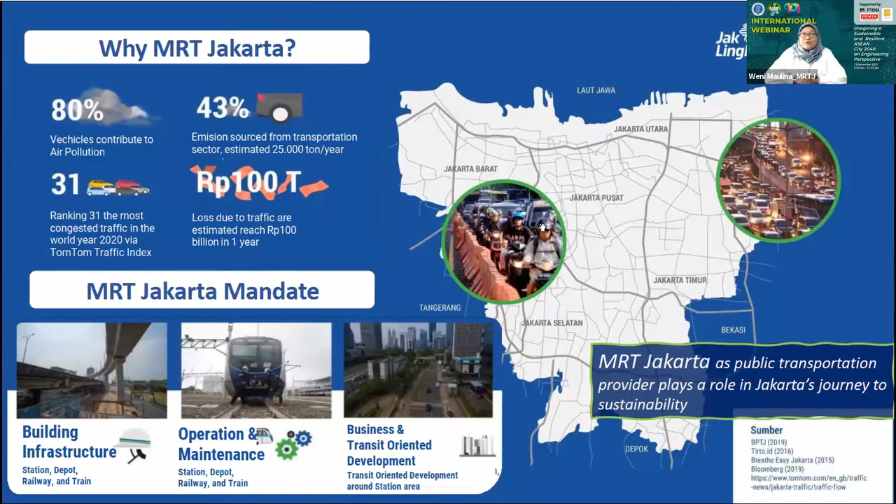Currently we are building MRT Jakarta phase 1 and phase 2 lines. For phase 1, from Lebak Bulus to Bundaran HI, from the southern part of Jakarta to the central part, we have built and now operate this, including 13 stations, of which 7 are elevated and 6 are underground. Currently we are also constructing the MRT line for phase 2A, which consists of 7 underground stations, about 5.8 to 6 kilometers of line.

In the future, we will also construct the phase 2B area, which goes along to the north, to the depot area in Ancol Barat, consisting of another 6 kilometers. Currently it's under feasibility study, and we are going to start the basic engineering design soon. All of these constructions are funded by a JICA ODA loan.

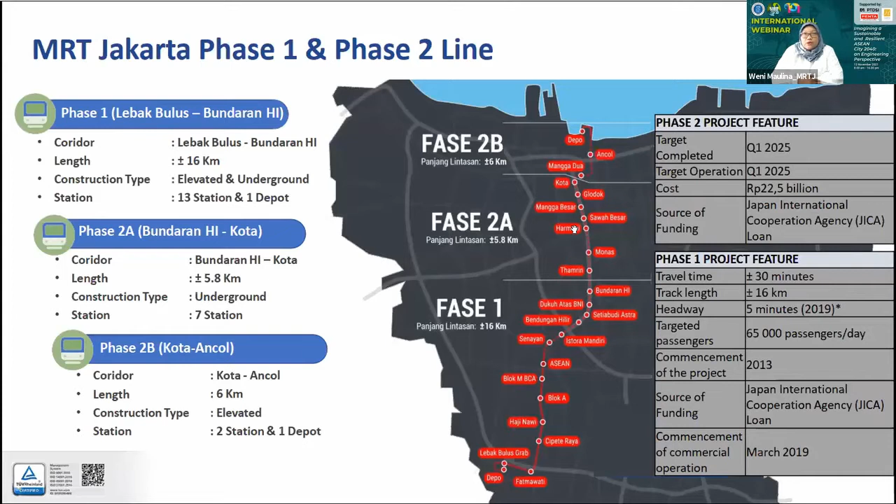As I introduced before, the MRT Jakarta journey actually started a long time ago, since 1989, with the first study of the Jakarta mass transit system. In the year 2000, we conducted the feasibility study of MRT Jakarta, funded by JICA and conducted together with the Ministry of Transport and the provincial government of DKI Jakarta.

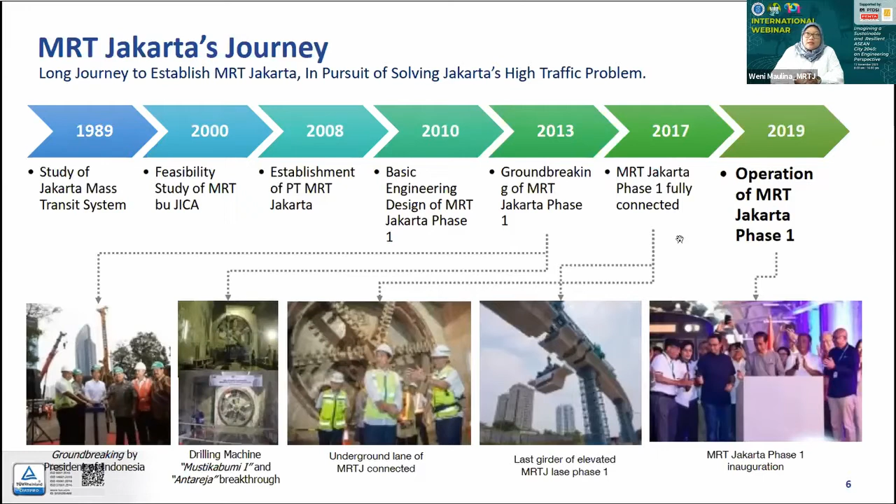In 2008, PT MRT Jakarta was established. Since 2010, we started and finalized the basic engineering design together with the Ministry of Transport, Directorate General of Railways. In 2013, we started the first groundbreaking of MRT Jakarta. By 2017, all of the infrastructure had been connected from south to the central of Jakarta, to Bundaran HI. Lastly, in 2019, we started the operation of MRT Jakarta, and at the same time we also started the phase 2 construction.

We have a traveling time punctuality of 99.8%, dwelling time of 99.8% also, and arriving time of 99.7%. So as you can see, we have almost 100% punctuality in terms of time.

So how can MRT Jakarta support and create a sustainable city? I would like to explain first from the economic point of view. Not only the operation of MRT transportation, but also since the construction of MRT Jakarta, we have played the role as a stimulus to the economy by having about 1 million US dollars for capital investment and also revenues.

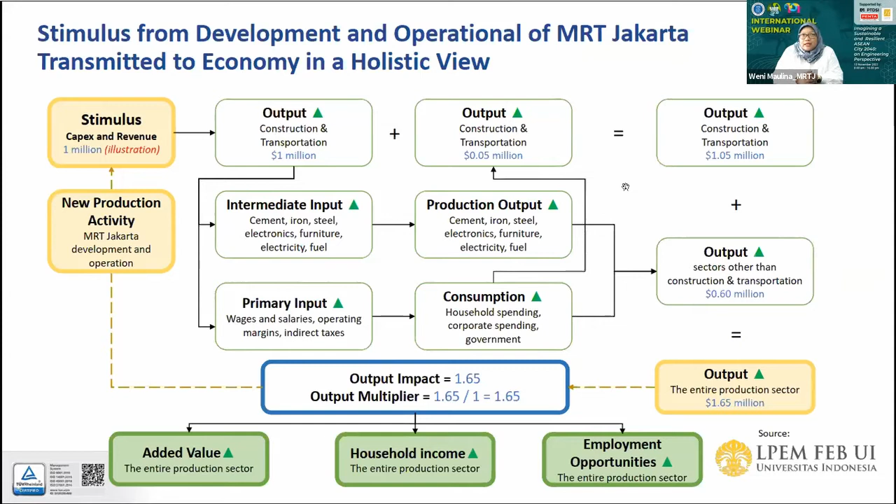So basically, by having the construction and operating the MRT as a public transportation mass rapid mode, we generate added value and also generate household income and employment opportunities.

So by having the MRT Jakarta during the construction and the operation time, we are giving a stimulus to the economy, not only of Jakarta but also in the national region.

We also have economic impact by building the transit-oriented development. In the MRT Jakarta TOD scheme, we have coordination between the government, MRT, and the developer. The government will collaborate with the developers and also MRT Jakarta.

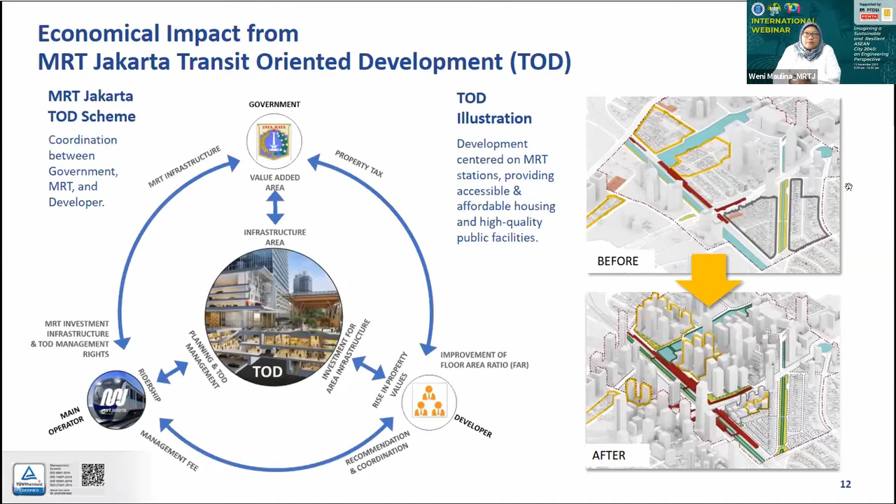Maybe next slide we can explain what is the potential of MRT Jakarta based on the TOD itself. We have the potential multiplier effect, about 242.2 trillion rupiah, the growth of property values in the MRT Jakarta area along the line.

And then we have the potential of 639,000 employment, about 34,000 units of potential development on affordable housing in the TOD area, and also 149.1 kilometers of pedestrian path that's going to be built, about 73.9 hectares of public open space that we have identified, and about 56,800 square meters of active riverside.

So when we construct and operate the MRT Jakarta, it is not only solely on the transit or transport mode itself, but also on the areas nearby that we're going to develop.

So the potential contribution to MRT development: first of all, it is the biggest contributor for the MRT non-fare box revenue, and also the source of funding for future MRT development, and then improve the pedestrian access and comfort around stations, and provide adequate integration with other public transport modes.

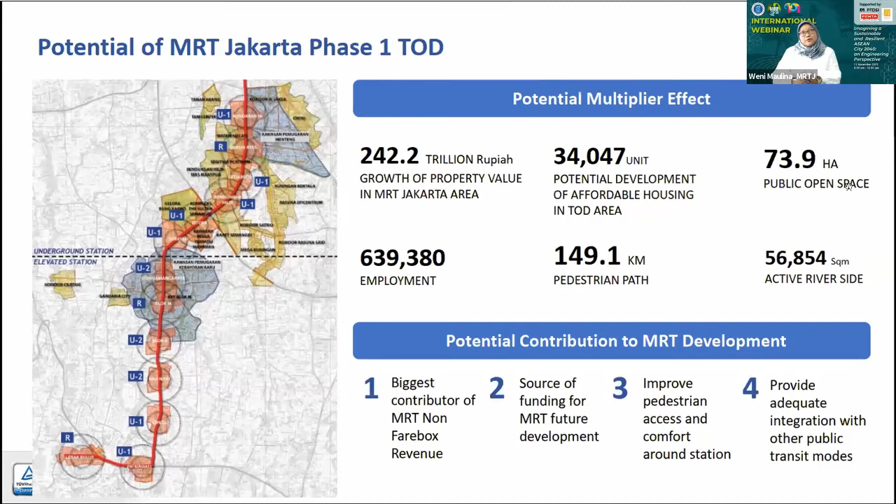One of the highlights we are making by having the underground MRT stations is that by providing connections to the surrounding areas, investment and development of the interconnection around stations will become an advantage for the surrounding areas and trigger regional revitalization as well as economic growth.

I think this is the main issue that we are going to discuss today: how MRT Jakarta can give better accessibility to the surrounding areas.

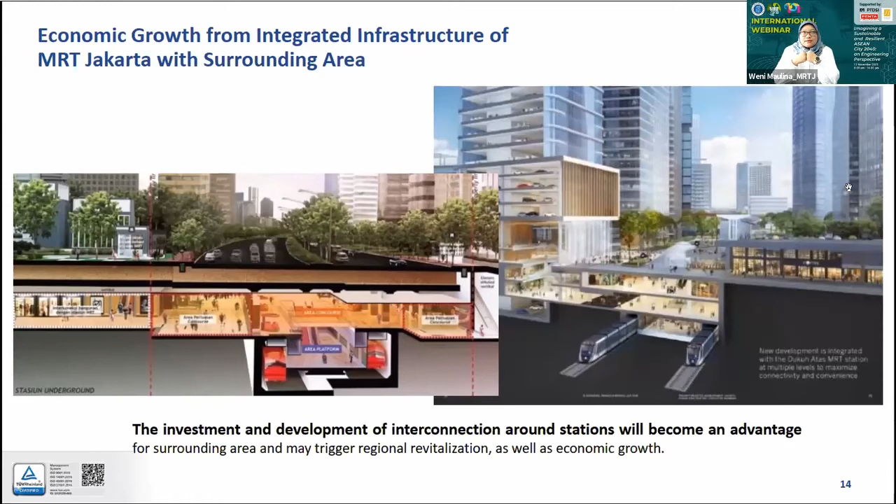As part of sustainable public transport, other than providing the transport mode itself, we are also building a new culture. This has been done since 2019. We have always made public socializations of how to use the trains, how to get down from the trains, and so on, and it kind of changed the habits and culture of the people of Jakarta.

We provide also better opportunities like having public space, building public spaces, green spaces, pedestrians, and also bicycle infrastructure.

So some habits that are changed is that... sorry, bisa di zoom?

The first is that trying to shift people to use the public transport modes, and they are using not only MRT, but they can also use their own bicycles to go to work, or from their homes to their destinations. MRT Jakarta facilities can provide bicycle racks, and we also provide bike areas in the trains, or they can use folding bicycles very easily and still use the trains.

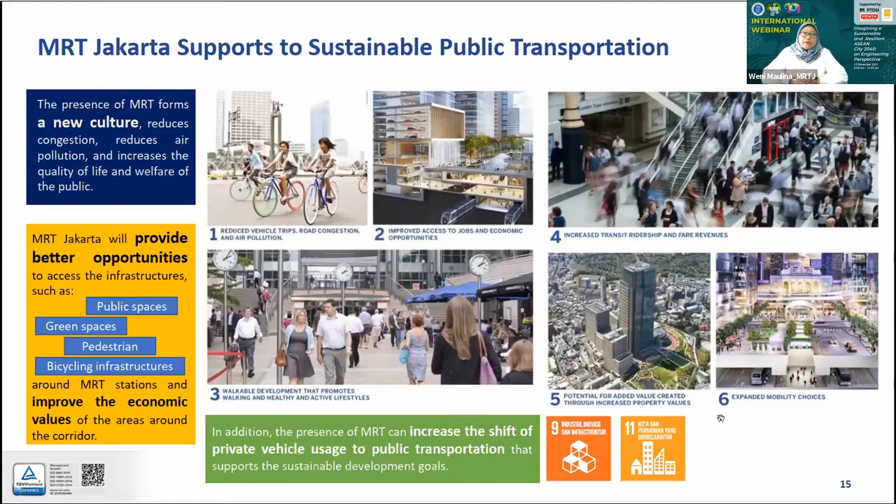Currently, MRT Jakarta has a policy of sustainability management by applying ISO 26000. We have prepared this as one of our sustainability strategies based on the social responsibility and sustainability roadmap. We also have applied ISO 14001:2015 on the environmental management system, and we have applied integrated management systems, not only for quality or occupational safety and health, but also considering railway safety, environment, and security.

One of the sustainability goals we are now applying is energy efficiency in our trains. First of all, we are using electricity as the main energy source, utilization of LEDs, and non-CFC air conditioning, and we provide platform screen doors for energy saving. The benefit is a reduction of carbon footprint generated by motor vehicles currently using fuel, reduction of greenhouse gas emissions that trigger global warming, and improved urban air quality to support the sustainability of the city in the future.

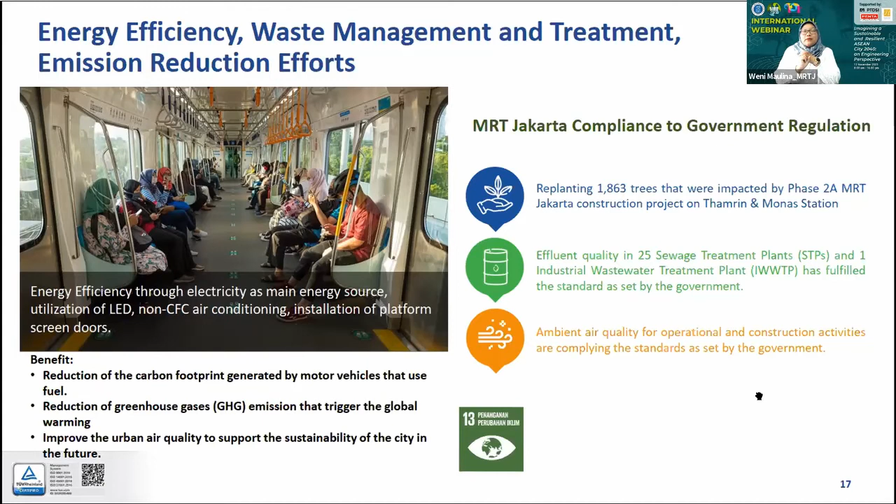Here is also our initiative to create a better environment. We have conducted collaborations with some startup companies, which motivate and encourage the environmental sector. We have collaborated with Jejakin and Rekosistem for the digital recycling system, and we have also collaborated with a bike sharing company.

For sustainability development, we also engage in social management. We have collaborated with Pos Sahabat Perempuan dan Anak (PSPA), and with UMKM empowerment programs, so most of the retail in our stations is also collaborated with UMKM. Internally, we also encourage gender equity through Equi Talk, and in terms of facilities, we have provided accessibility improvements in the stations and surrounding areas. Lastly, we have collaborated with and supported the mitigation of COVID-19 impacts with the provincial government of DKI Jakarta, including initiatives for mass COVID-19 vaccines and so on.

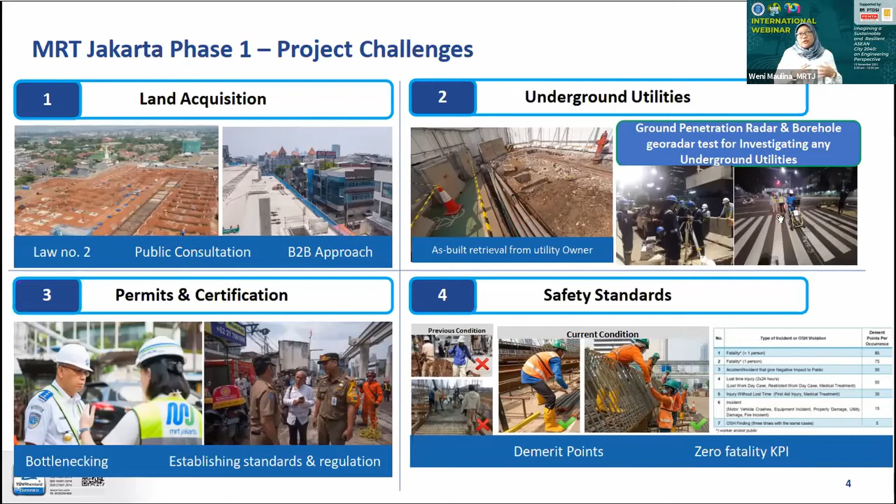Another challenge in phase 2 is more engineering and technical, whereby going to the north, MRT will face soft soil conditions. So we have to conduct soil improvements; strengthening and monitoring measures are required. Also land subsidence and flood threats require improvements in design, better monitoring and standard operating procedures, and also innovative solutions that we have to look for.

Also going to the north, we are facing construction in a very narrow corridor, whereby on the left or right there will be buildings, and in the middle there will be canals. We are also facing old or heritage buildings in close proximity. So we are facing design improvements by having some traffic deckings, and we have to have a very comprehensive traffic diversion plan, so that we can close the lane or close the roads at some times, and construct more appropriately.

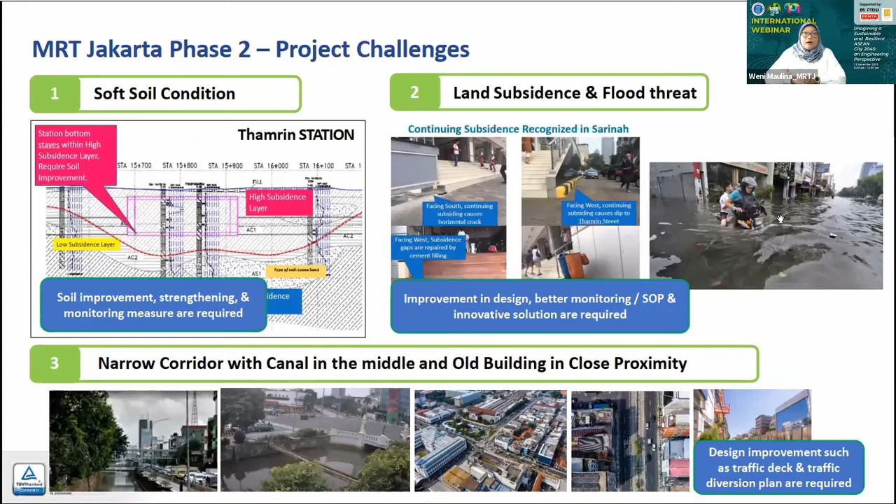The other thing that is also unique for the phase 2 area is that we are coming to the heritage side and facing a lot of heritage buildings. Since the basic engineering design of phase 2, we have been conducting archaeological studies and archaeological test pits. In fact, now that construction has been carried out on site with the contractors, we have found several findings, which we call ODCB, objects suspected of cultural heritage.

So based on Law Number 11/2010, we have to do some procedures to maintain and also to make the findings safe.

Another thing is we provide an OSV, on-site visualizations. This is a kind of monitoring when we do construction on site. When we do deep excavations, we install this kind of OSV monitoring device, so that when there is, let's say, an inclining, we can have the alert and alarm level, not only by numbers but also by lights, so these lights can also alarm the workers on site when it turns yellow or when it turns red.

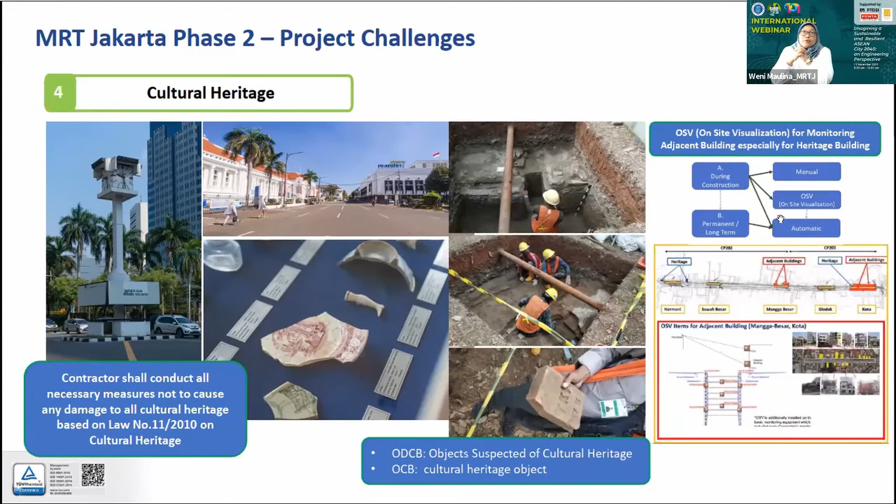Then that means the workers on site need to get out from the excavation area to be safe. That is because there is an alarm level of the inclining slopes or some problem in the excavations. So this is what we are going to apply in the phase 2 area.

Now coming to the design itself, for the infrastructure, how MRT is being built as a resilient infrastructure. I would like to highlight the main points only, especially on the flood area, a flood protection system. As you may have heard, Jakarta is a flooded city, but we have provided a flood protection system, some levels of protection in the MRT.

First is to provide additional entry steps with a minimum height referring to the 200 years flood return period. And also we have installed the floodgate as a second measure. And the third one, we install the sump pit inside the stations itself. If everything goes wrong, then the water will come to the stations, and this water will be collected in a sump pit.

Next one is the earthquake design, where MRT Jakarta has 2 levels of earthquakes. So we design by having an ODE, operational design earthquake, and also MDE, maximum design earthquake. What does it mean by operational design earthquake? ODE means that when Jakarta is having more or less a middle scale earthquake, these ODE requirements or scenarios will be implemented.

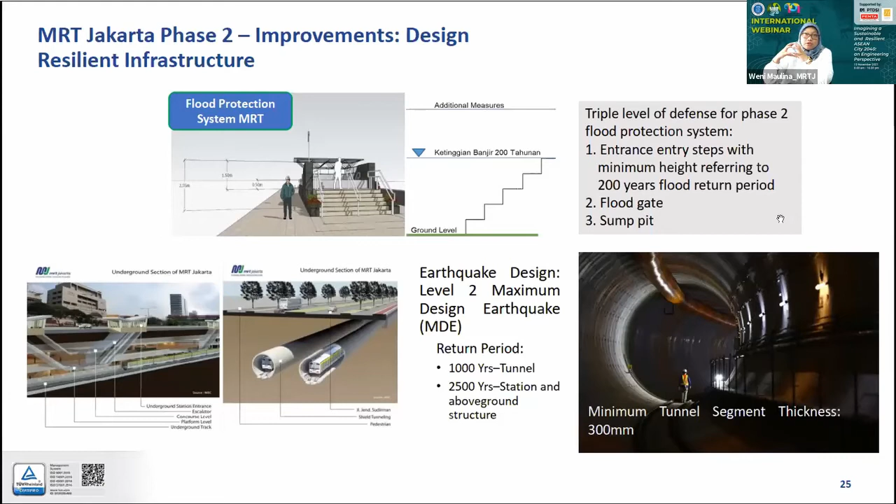By having this maximum design earthquake, we intend that the structure may have some faults, some problems, but it should be repaired as soon as possible. So we are looking for the immediate occupancy level of the structure. By this, we have a minimum thickness of tunnel lining of 300 millimeters.

The other one is, by having MRT Jakarta, we have this resilient structure to be part of the sustainable development goals. Another thing is we have the cultural and heritage educational space that we intend to have also in MRT Jakarta. So for example, we have Monas station.

So MRT Jakarta will collaborate with the authorities and stakeholders such as Museum Nasional and Galeri Nasional to provide a curatorial of Monas station artwork and gallery. So this one is intended to have a cultural education purpose, especially in the Monas area.

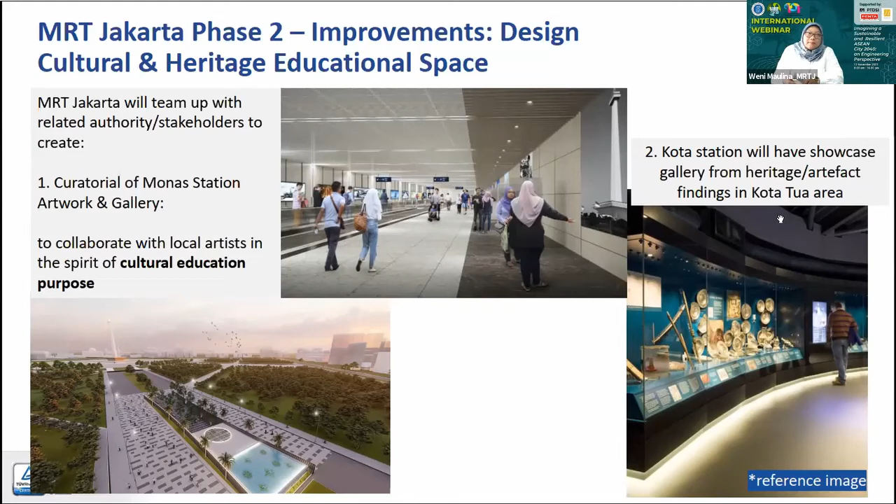And also in the Kota station, we will provide a showcase gallery for the heritage or artifact findings in the Kota Tua area specifically, or perhaps in other phase 2 lines also, and we collect them and put them in the Kota station. This one is also a collaboration with the authorities, with Dinas Kebudayaan and the team of Cagar Budaya.

Okay, the other thing is that we have an advanced railway technology, whereby for the rolling stock itself, we are using LED lamps for lighting, and also we are using electricity in the form of overhead catenary as a power source. We are not using gas or fuels or diesel. And we also provide a regenerative braking concept in the trains, where the remaining energy that comes to the trains can be stored.

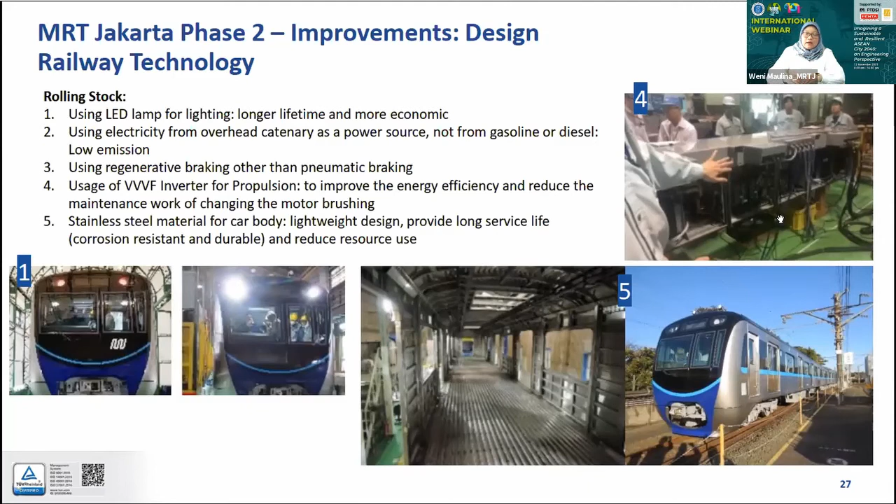And then we are using the VVVF inverter for propulsion to also improve the energy efficiency. And for materials, we are using stainless steel material for the car body. Also, in terms of railway technology, we are applying communication-based train control signaling. So it will have a more reliable and safer environment for the signaling system of the trains.

Next is the integrated infrastructure. So when we do the designing, our approach is first to make a compact design of stations with better circulation. Most of all, what we have to underline is how passengers can be convenient when they go to the underground stations or the MRT stations, how they can be convenient, and the level of service in congested areas of the stations that we are providing.

So the first concept is that in the design we are considering the fast movement of passengers, and also the personal space for passengers when waiting or circulating in the stations. Next is the direct connection with adjacent buildings. As I mentioned before, this is one of the benefits of having the mass rapid transit system with underground stations, whereby we can have direct connections to the properties nearby.

And this is one of the key issues of transit systems when we are going underground. The other thing is, when we do the design approach, we also need to think about accessibility. So we are underlining that we have universal design for disabled persons, pregnant women, and also the elderly. These are the most important features when we do the design of the stations and tunnels.

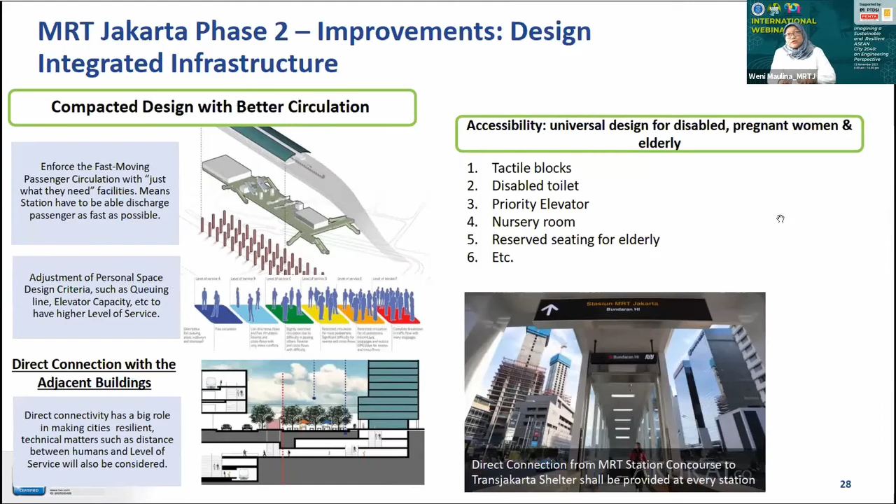The other thing is that we have now applied digital transformation in the construction and also the operation of MRT Jakarta. What I introduce here is especially on the construction side, whereby we have implemented building information modeling with maturity level 2. This is also a lesson learned from the phase 1 project. The main important thing is that we do everything by digitalizing, and this gives us the benefit of easy coordination with several contractors. We have 8 contractors actually.

So we have easy coordination with the contractors and consultants, and it also provides clash detection, so we can identify any clash at the beginning of the project, rather than looking at manual papers and identifying the clash at a later stage. So we have applied this building information modeling as part of our construction works.

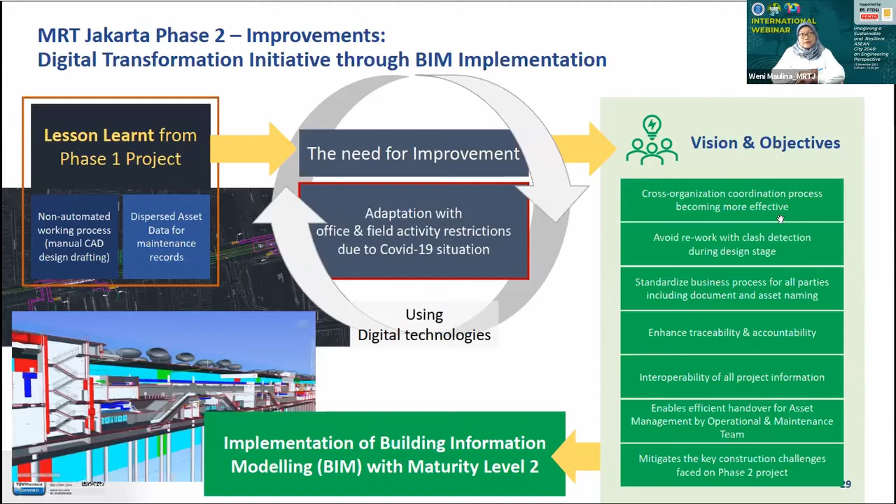Next. Okay, so what is in the future for MRT Jakarta? One of the initiatives we are looking at right now is a program called Birukan Atap, Birukan Langit, a program that aims to revolutionize the MRT Jakarta energy system through the integration of renewable energy infrastructure. Currently we are using electricity sourced from PLN, and now we are looking for another source, perhaps new or renewable energy. The aim of the program is to enable 100% clean electricity for the MRT operation.

So the 3 innovative renewable energy schemes being implemented are, first, the solar rooftop scheme, second, applying renewable energy certificates, and later the renewable energy power itself.

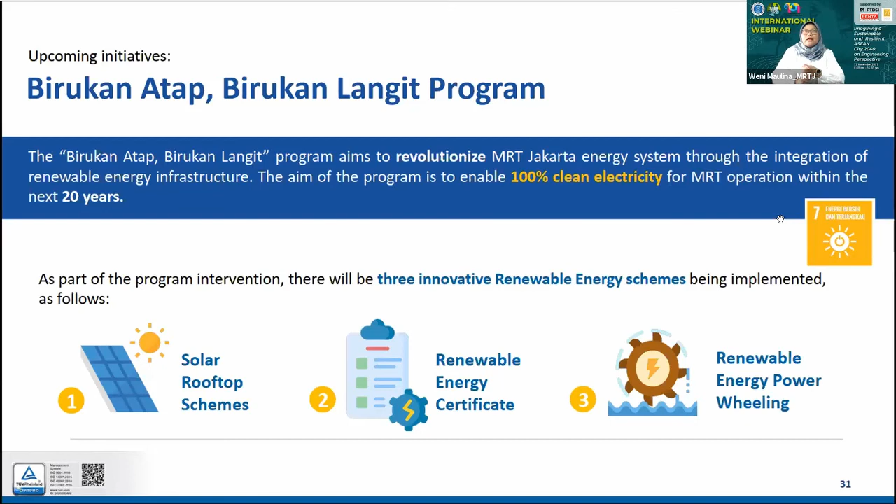Next. Ibu Weni? Also, so this is my last slide.

Oh, okay. So the future network expansion for MRT Jakarta. You can see here that DKI Jakarta itself has railway network initiatives by the year 2039 for a total of around 215 kilometers, and including the central government, about 381 kilometers. Part of that is the MRT Jakarta rail network, in total later about 80 kilometers.

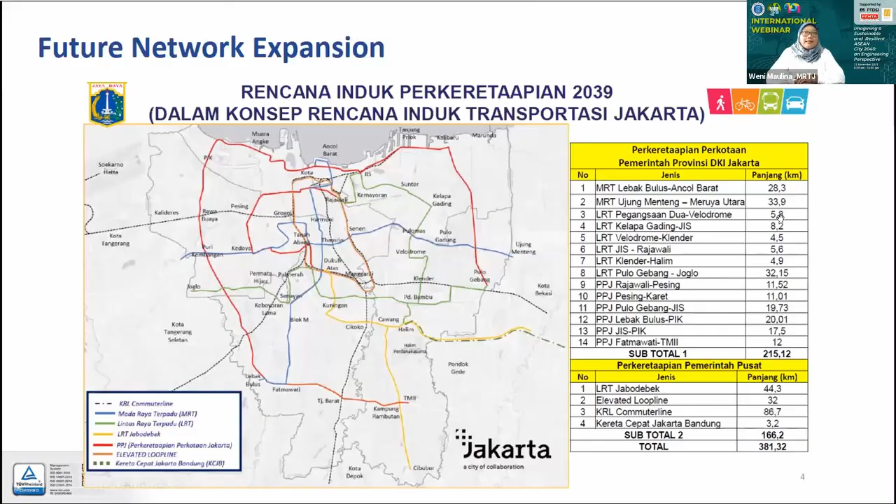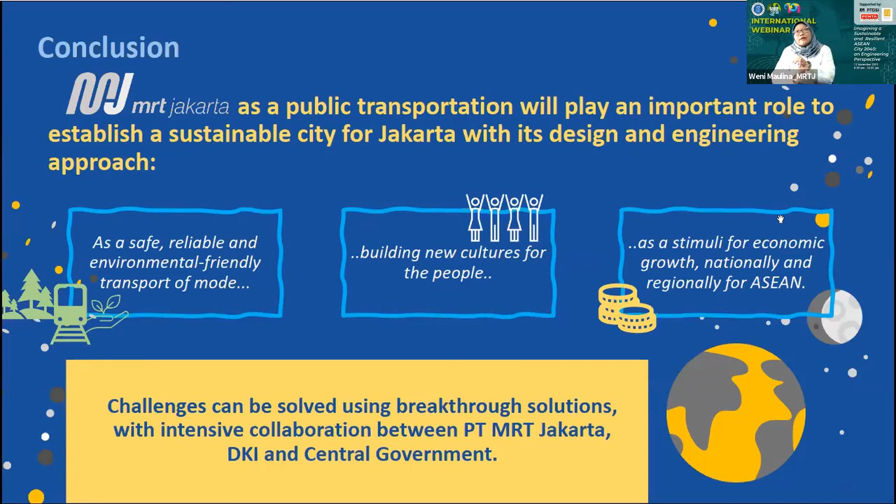So in conclusion, MRT Jakarta has the vision of increasing mobility and improving life quality. I hope you have seen from my presentation what the vision of MRT Jakarta is. As public transportation, MRT Jakarta is playing an important role in establishing a sustainable city for Jakarta with its design and engineering approach. First of all, of course, as a safe, reliable, environmentally friendly mode of transport, building a new culture for the people, and also a stimulus for economic growth, nationally and even regionally, even for ASEAN.

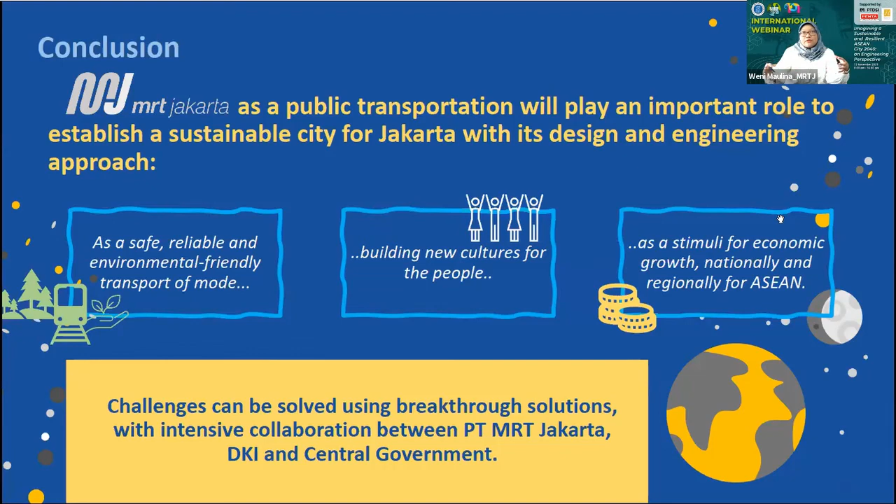Challenges can be solved by using breakthrough solutions in intensive collaboration between MRT Jakarta, DKI, and the central government. That means, as Ibu Reni also mentioned in her keynote speech, policy and strategy are very important in how we can develop sustainability in the cities.